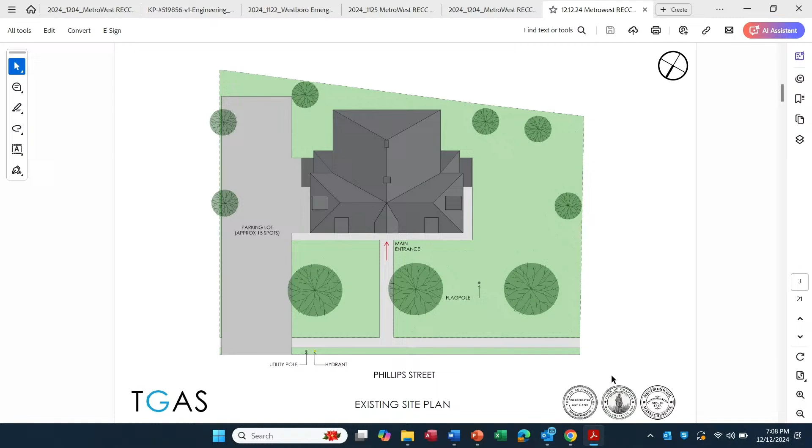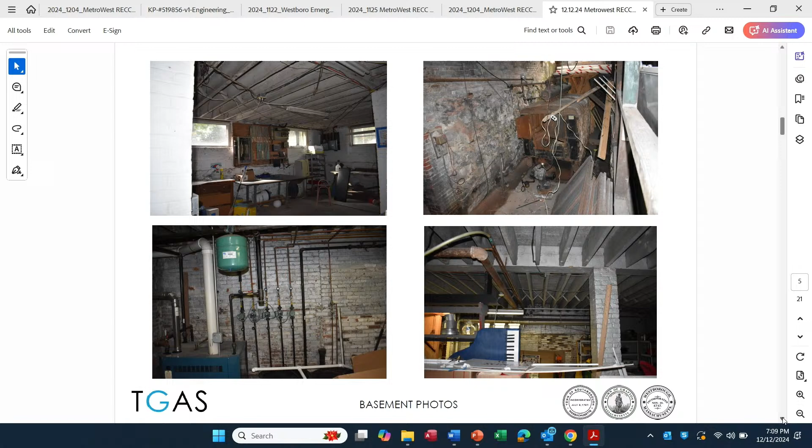Shown kind of abstractly, photographs of the building. It's a stately masonry building that's been around for a while, with very nice character to it. The inside of the building, for those who've not been in recently, is in fairly tough shape and needs a fair amount of renovation, but is certainly a serviceable building and has very good bones, we like to say.

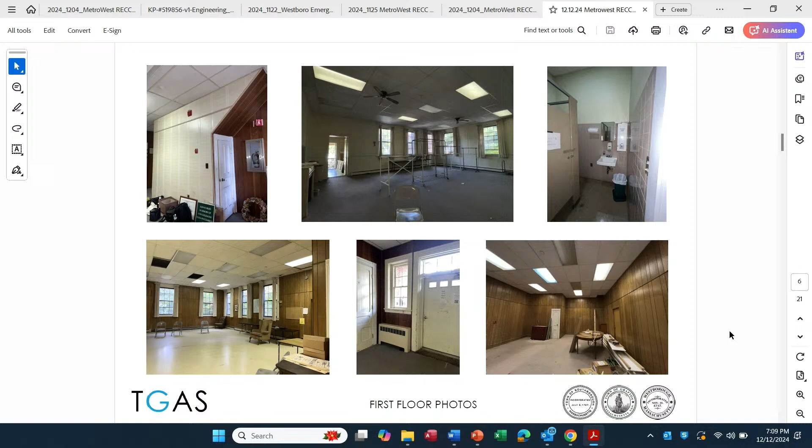But otherwise the building's interiors are outdated—this paneling might be coming back, it's in style these days, but it's not in great shape. There's also an attic space up on the top floor.

The proposed site plan is not changing a lot. Phillips Street is here, with a parking access that's here now. There are parking spaces being proposed along the left side of the plan, a number of handicapped accessible parking spaces, and what's known as an accessible entrance.

There'll be a new elevator proposed at this portion of the building. There are some building systems being put in place, including a generator, so that if the power goes offline, someone can still dial 911 and the emergency communication center stays operational. There are also HVAC units that will be outside at the back of the building.

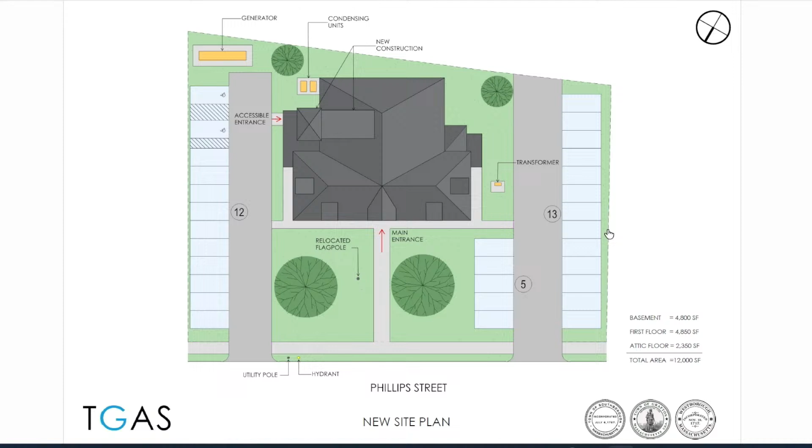It's the same color and shape as the existing roof, but there's a proposed roof adjustment, a new roof portion, over here. There's an entrance at the front of the building which stays, and the front of the building stays largely as it is—there's really no visual change. There's parking proposed on the right-hand side as well, and some utilities there, including a small transformer.

For the basement floor plan—part of it will be used for storage, as you can see in the upper right corner. Then there is the IT server room, a very important space for these kinds of buildings, and the elevator machine room. On plan south, we have a gender-neutral locker room so that dispatchers, when they come in, can access their lockers, go to the restroom, get changed, do whatever they need to do, and then come back upstairs to start working.

How do I go—next one here. Yeah.

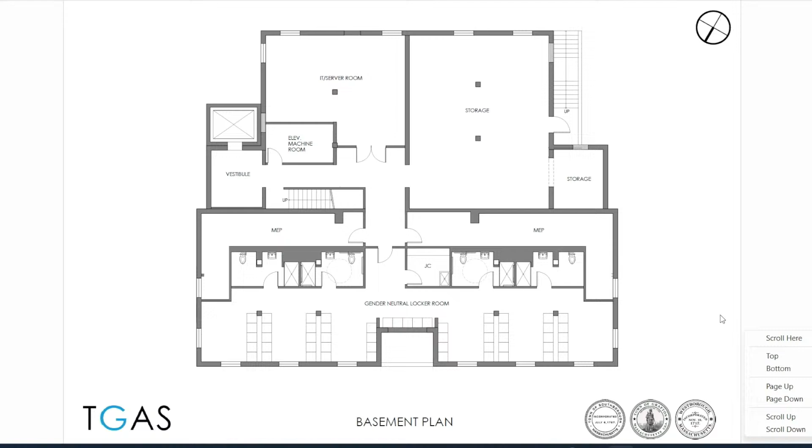On the first floor plan, plan south of the building, you see the main entrance, the current entrance, which brings you up into a little vestibule. It's a secure vestibule, so whoever comes to the building needs to be buzzed in—being this is an emergency communication center, it has to be a secure building. We're also looking at some ballistic level protection for that vestibule, so there is protection against any sort of attack against the building's entrance.

There is an admin office right on the left-hand side with a transaction window that can overlook the entry vestibule directly. Then there is the executive director office, another office we'll just name for now as a future management office. And on the right-hand side there is a training room for 30 people.

Between the training room and the admin area, there is the entrance to the dispatch room, which can host up to 13 dispatcher workstations, with one workstation for the supervisor in the lower corner. On the side we have an office for supervisors and a break room connected to both the dispatch room and training room.

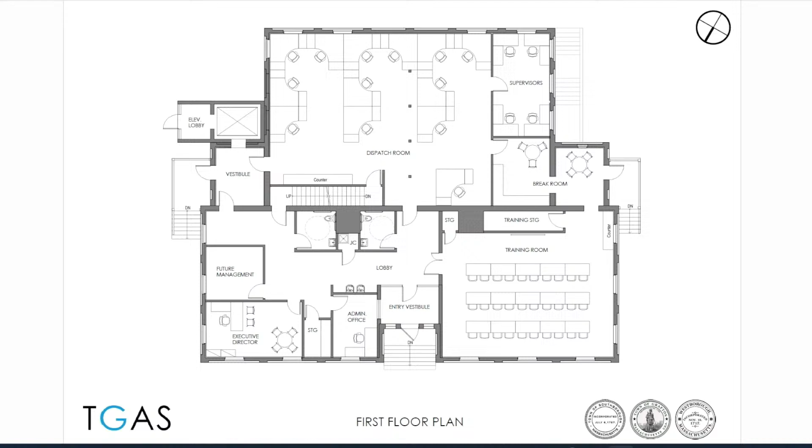Too far. Just one. Okay.

Moving up to the attic floor, on the left-hand side we see the elevator. Initially we didn't know if we wanted to go to the attic, but we decided this was the right time to do the work, so we want the elevator to access all floors: basement, first floor, and attic. Out of the elevator, there is a corridor that brings you into the area where most of the mechanical systems of the building will be located.

On the south part of the attic, which currently has dormers letting daylight in, we can use that portion in the future if there's any need to expand for additional offices or additional stations. We don't know yet, but we're keeping that area as a future expansion area.

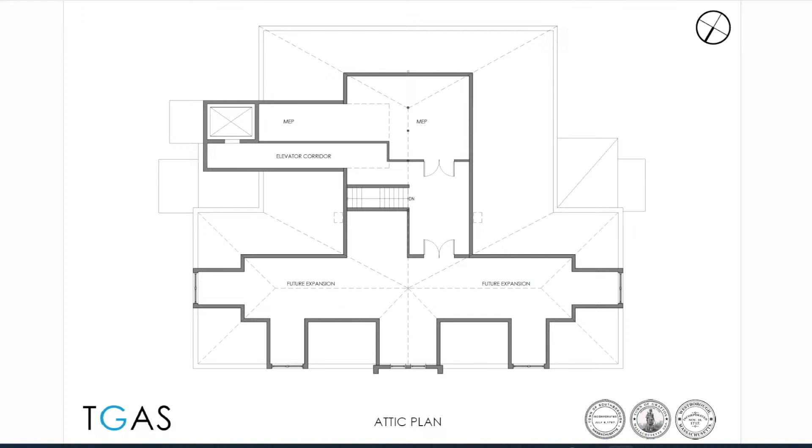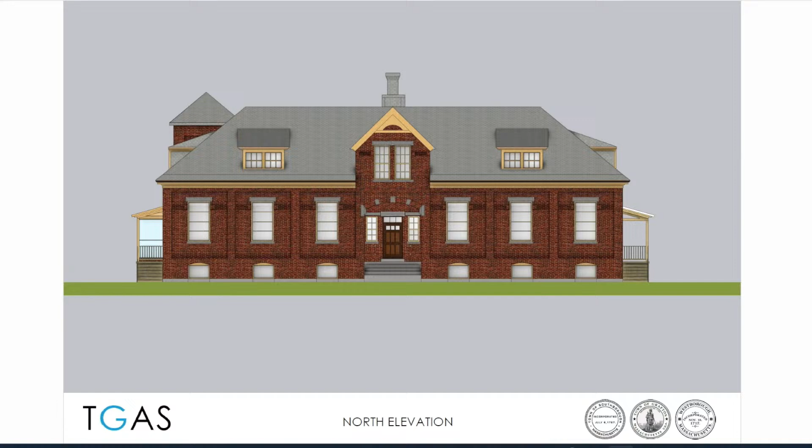But on the side and in the back, you can start to get a glance of the new volume, the elevator volume, which is better seen from this side. Going around on the east elevation, you see a little entrance with some glass — that's the entrance to the small vestibule elevator lobby. The volume directly above is the elevator shaft.

We worked on a few designs, but decided that keeping the volume in the same style as the building would be the best option. This is a beautiful building, so we want to keep the history and continue it with the same material.

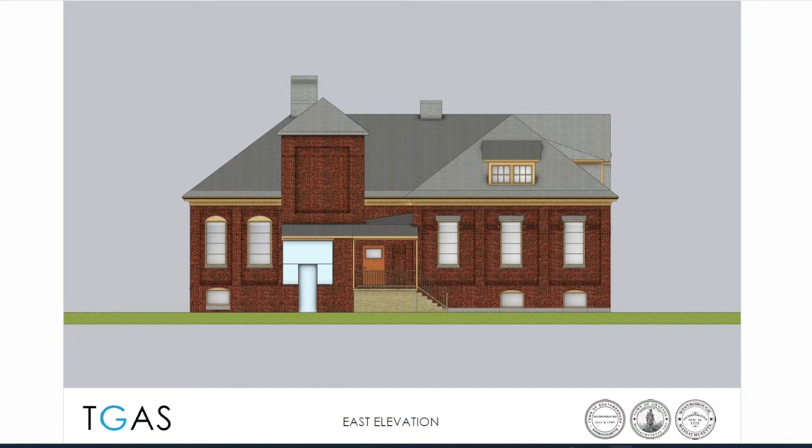So, a brick shaft. There's an inset, as you can see on top of the entry vestibule, mimicking the insets that the building has around each window. And then there's a hip roof on top of the elevator shaft.

From the side, the yellow triangle on top would be the cover for the corridor that brings you from the elevator volume into the attic space. Because of the shape of the roof, we need an additional volume between the shaft and the roof itself to access that area.

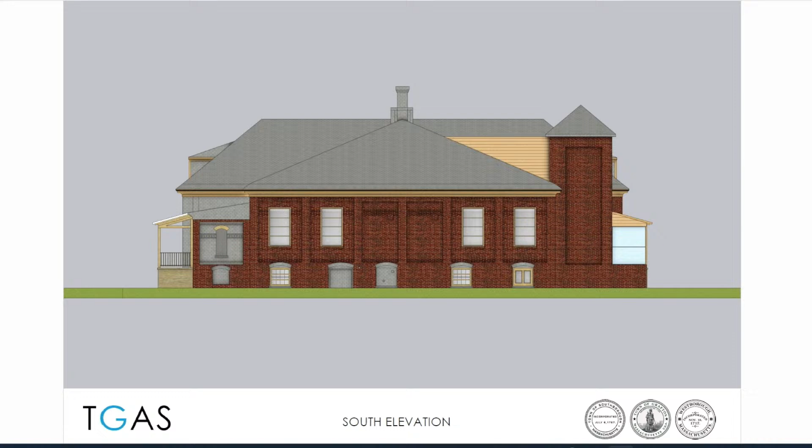These are the same model but in a 3D view. So you see the front of the building, the elevator shaft with the vestibule entrance on the left-hand side. From here, this is the back of the building, and you get a better glance of that new elevator shaft with the insets in the brick on each side.

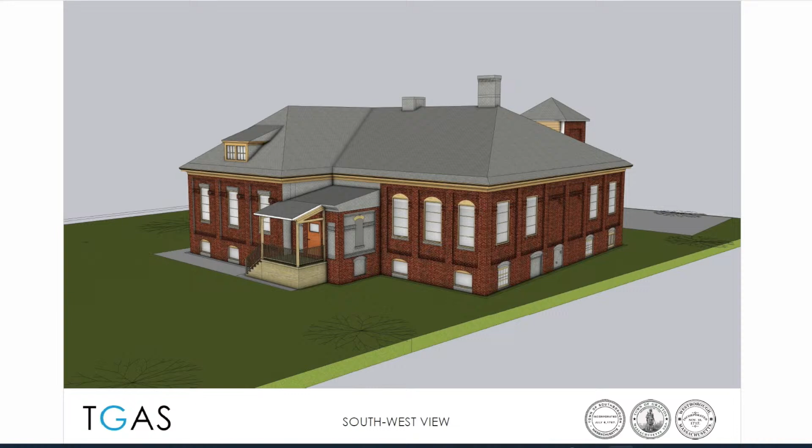And then from the other side, again, there is nothing really changing. Just see the roof of the elevator on the other side.

Schedule-wise, we are working right now on schematic drawings, so schematic design, which we are planning to have by the end of the month. Our schematic design will go to our cost estimator, which will start looking at all the work that is needed and start putting some numbers, which is one of the most important things.

We know that we have some availability. We know we have one grant, and the town is working towards another one. But of course, we want to get our cost estimator to tell us how much this work will cost, which would bring us to do some reasoning and say if we want to scale down the work, if there is something we can leave for the future. But it's all some kind of ideas that come together once we start seeing some numbers from the cost estimator.